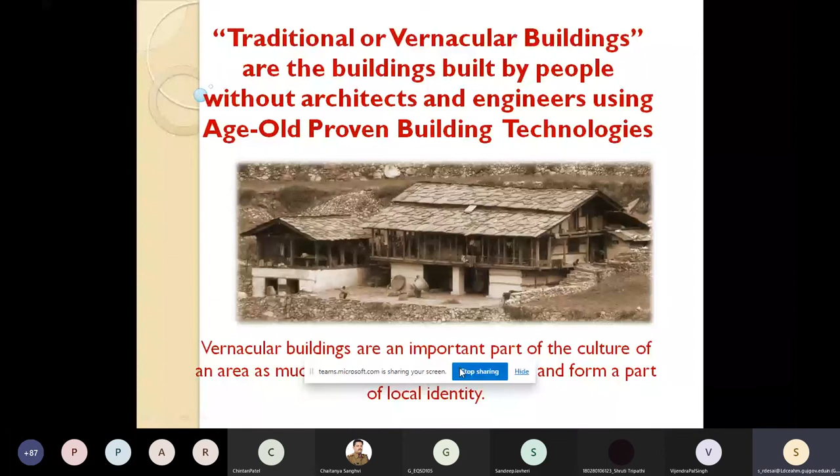So basically, these vernacular buildings, they form an important part of the culture of an area as much as language, food, and dress. And they also give a local identity. Very, very important part, integral part of all this.

So, sorry, why is this not moving? 1 minute. Wait a minute. Let me, I don't know. Let me just restart this thing here. Why it got stuck. Why I don't see this icon here? All right. Okay, sorry about that.

Technologies. All right. Let's move forward. So, let's look at very quickly some vernacular buildings in different parts of the country. Earthquake or no earthquake. Uttarakhand, of course, typically has stone buildings. There are mountains, nothing but stones. And of course the forest. So there is timber, there is stone, and a little bit of earth. So it's predominantly stone. And we go to northeast, there's ample biomass, bamboo, timber, variety of reeds.

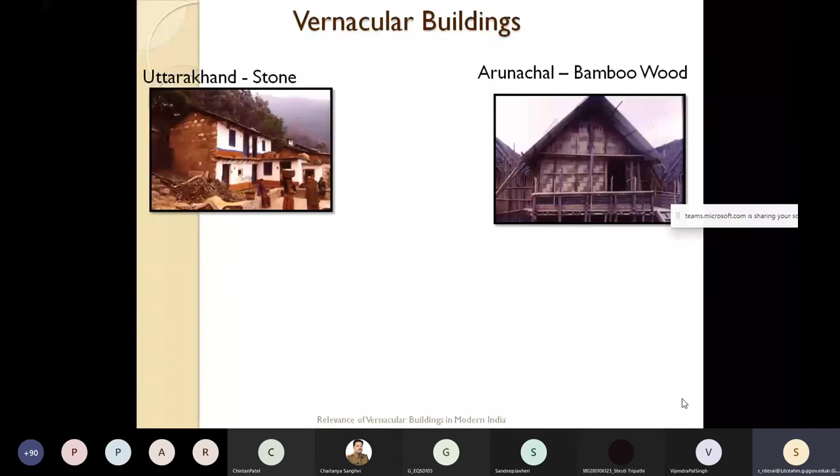Arunachal, of course, is rich with vernacular systems. Each tribe has its own system. And then you go further, a little bit south from Arunachal into Meghalaya, and you have this timber and bamboo system. Each one has its own peculiarities and very much related to the local things. And of course, in Kutch, there's a lot of stone and there is a lot of earth. So you have architecture which is combined with stone and earth.

And overwhelming majority of buildings fall in this category, vernacular buildings. We engineers think that we are these sort of designers and builders, but that is really not true. And also, interestingly, in a lot of these areas, even the lifeline buildings have been made with this kind of technologies because they are endemic to that area.

And a little bit about North Gujarat, where it is semi-arid. You have also earthen architecture, just straight mud or earth. And going back up in the Himalayas, in Spiti, and of course Ladakh and Lahaul, and all these areas which are in the rain shadow area, they get a lot of snow, but not much rain. And they are all earthen buildings because there's a lot of earth.

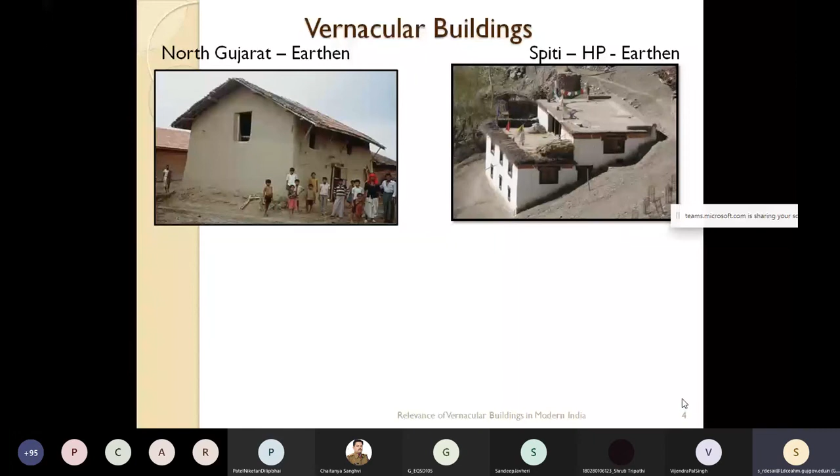And then, going to Kashmir. Kashmir has different zones, like all the states. In parts of Kashmir, you are in the hills where there is a lot of rock and there is a lot of woods, trees. So your houses are made of timber and stone or just stone. And then you come in the valley of Kashmir, Kashmir Ghati, what we call, and there is fantastic soil to make bricks. So you have brick masonry, fantastic brick masonry you have.

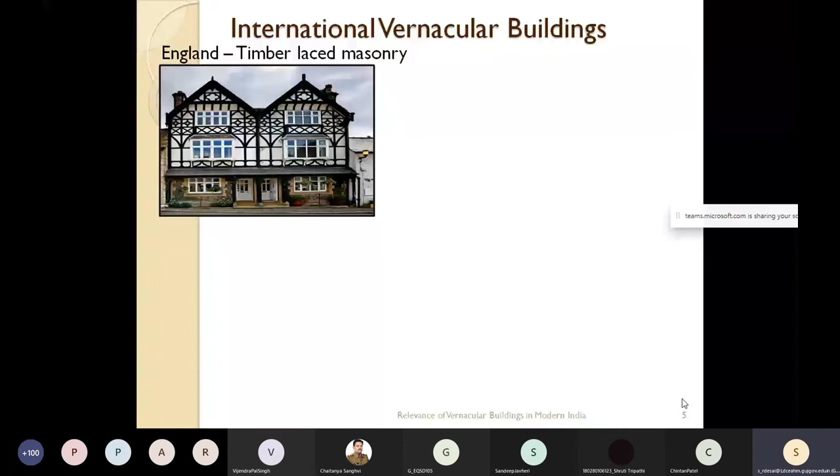And also let's look at some international stuff, because a lot of us with a lot of money, we go to England and we look at the British Tudor houses, which are basically timber laced brick masonry, just absolutely gorgeous looking buildings. And up in northern Italy, which is part of Alps, you have stone once again. So you have random rubble masonry, just like we have in our mountains.

And in southern Germany, which is also abutting Alps, there's a lot of timber. So you have timber buildings. And of course, in Switzerland, it's basically a lot of stone. And then look at this building. Look at this house, which has stone roof. It looks more like slate or flat stone. And this could be anywhere in Himachal or Uttarakhand.

There was a time when we had a presentation in Uttarakhand, and I was showing them these houses, and they were asking which part of Uttarakhand they are from. But these are world famous architecture, and people spend so much money to go and see that.

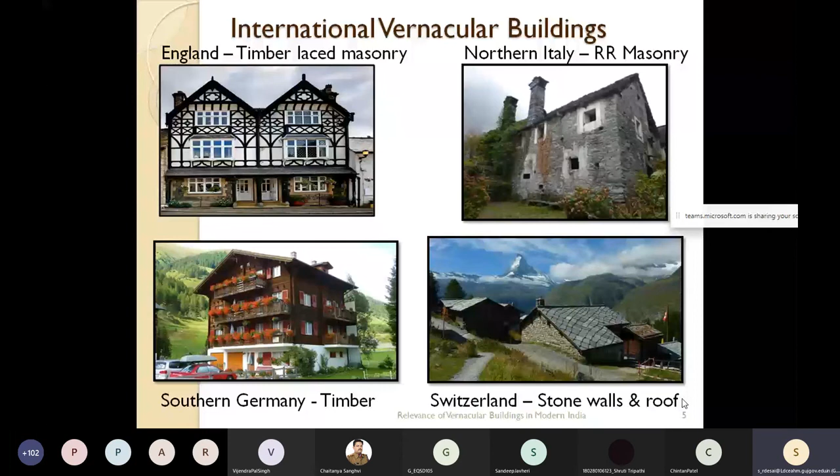And of course, we have another very interesting example of architecture from New Mexico state of Southwest United States. There's architecture of Pueblo Indians. These are the natives of America, of that region. And what you see here is the traditional American Indian settlement. It's multi-story. You can see 3 levels, all of mud and timber.

And this has become so popular in that region that expensive mud homes are made using that architecture. A lot of them may be mud houses, a lot of them may be make-believe mud houses. And believe it or not, we visited this area back in 1983. I mean, how many years ago? Nearly 40 years ago. And even then, we visited one house which was a $1 million house made of mud.

And very interestingly, you have this 4-star hotel in this town called Taos, which is a very popular tourist attraction. And you have this 4-star hotel, which is imitation Pueblo architecture. I mean, can you imagine things like that happening in this country? So it's a different world, and people appreciate these things there.

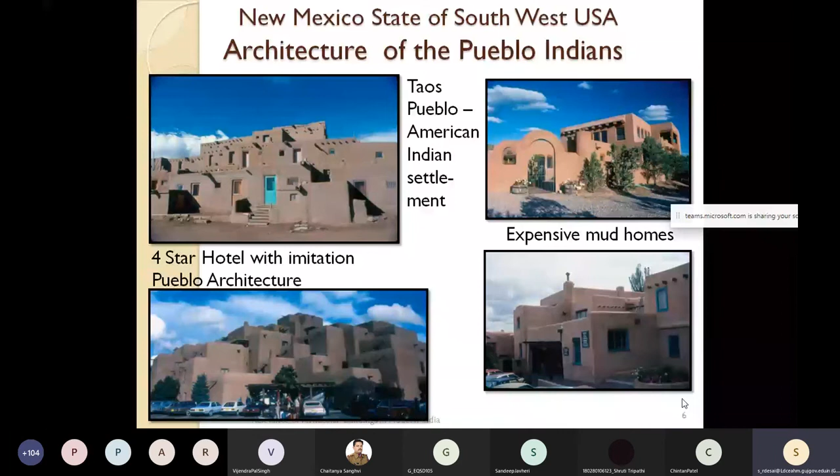Now, we need to look at some of the facts of vernacular buildings. Number one, as I mentioned, they're part of rich cultural heritage that provide unique identity to every region. Even a small state like Gujarat, it's a tiny state, and you have...

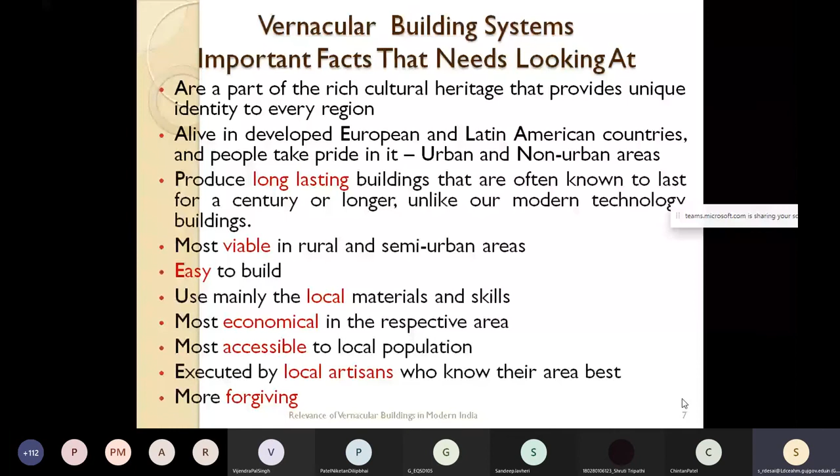There are a lot of myths, there are a lot of false understandings about this. With our civil engineering education, which starts and ends with cement and steel, there are biased mindsets. I mean, I completed my IIT education 50 years ago, and that's what I learned: cement and steel. We were not even taught about bricks. And I don't think things have changed even today. And this ultimately creates our mindsets when we come out of our colleges.

About the vernacular and traditional building system, what is it? Number one, we feel that they're outdated and they have no role in modern India. Just trash them. Number two, they are not scientific, and hence they are not worth considering for use, and hence not worthy of research. Tell me how much research gets done in these IITs and NITs and all other big engineering colleges. How much research gets done? Really, very little, if any.

Unfortunately, it's considered a sign of backwardness, poverty, and shame. And we give it a derogatory name called Jhopri. That's called hut or Jhopri. I mean, that means something that's bad, something you want to disown. And they're called kacha, and hence unreliable and unsafe. It's very, very interesting. That if it's kacha, then unreliable and unsafe. That's what our engineering mindset tells us. And so engineers are ignorant about the subject and hence have abandoned these systems in all their use.

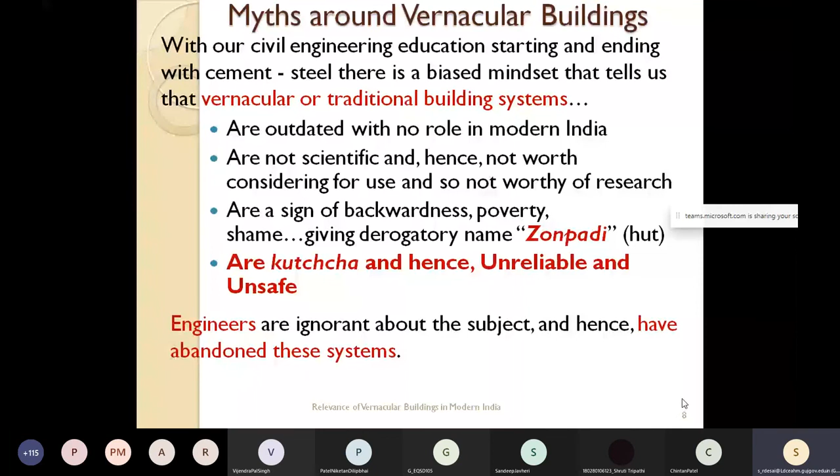Now, what has also happened in the last, I'll say maybe 26, 28, 30 odd years, poor performance in the recent disasters of these vernacular buildings has strengthened the mindset of the engineers and, as a result, the people. Now, let's look very quickly at performance in recent disasters.

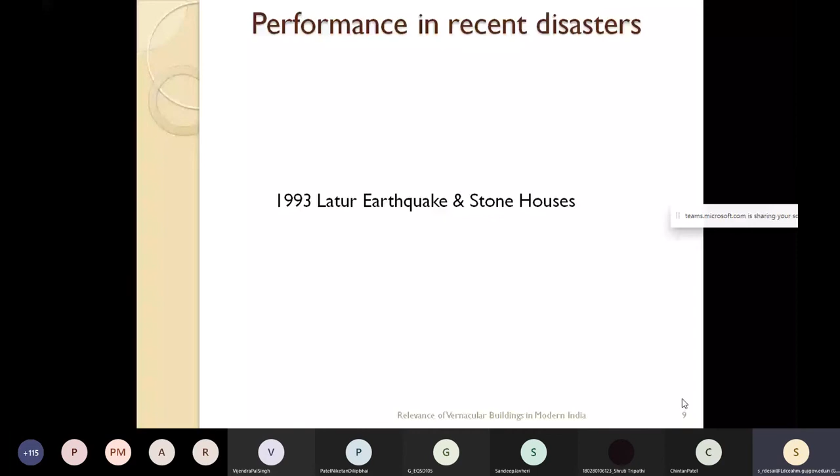It was the 1991 Uttarkashi earthquake, very quickly the 93 Latur earthquake, and basically stone houses. This is what happened. I mean, these houses simply disintegrate. And in a very small area of 20 kilometers by 20 kilometers, just think of how big that area is, 400 square kilometers, something like 9,500 people had died.

And a few years later, the 1999 Chamoli earthquake. Again, these are stone houses, and houses performed pretty badly in a small area. In between, I missed the 1997 Jabalpur earthquake, which were essentially brick houses and mud houses. A very small earthquake of very low magnitude and still kind of intensive damage in several villages.

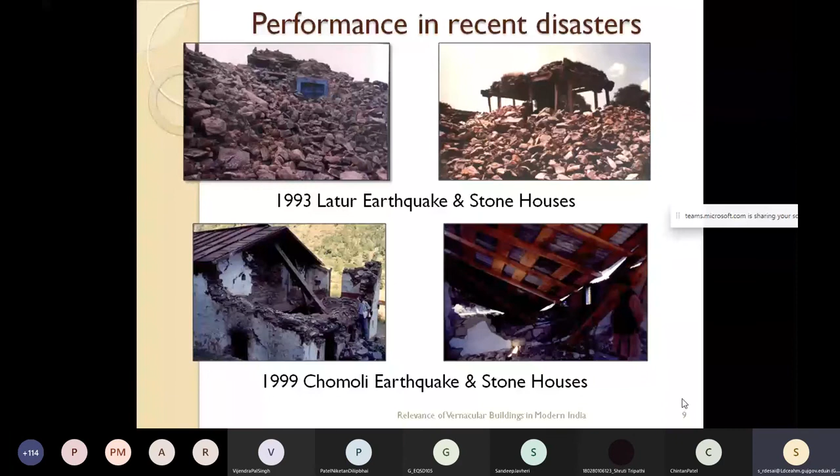All right. More recent, the 2001 Kutch earthquake, and once again the vernacular systems, primarily of stone, and of course earth, and in some places bricks, and these buildings did quite badly. And then 2005, the Kashmir earthquake, and again brick and stone houses, and this is the kind of thing that happened.

In the Kashmir earthquake, the epicenter was in Muzaffarabad, and as a result, the damage and the destruction and the deaths were of a far larger magnitude on the Pakistan side, but still a lot of damage. And this does not mean that vernacular buildings, which are what we call people-made buildings, have to be so vulnerable and weak.

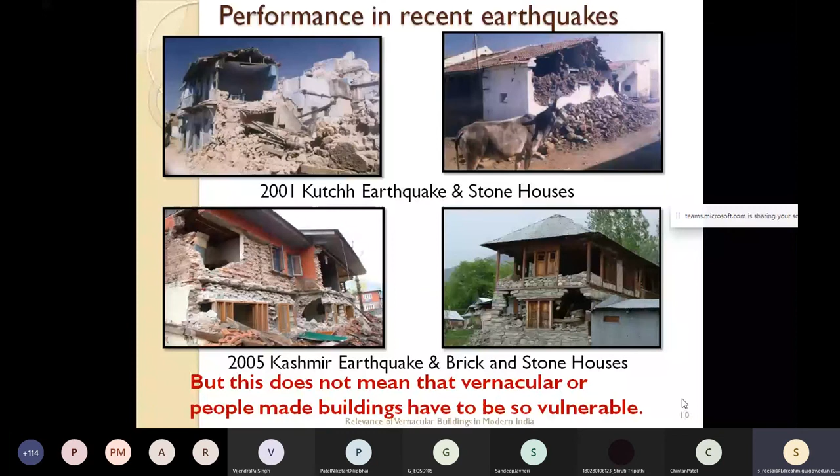Now let's understand a little bit about these buildings, the building systems. First and foremost, these systems can bring safety against disasters, unlike what we engineers think, if they're built as per the age-old traditions with proven performance. All right. What we have been seeing is far from that. I mean, I've been involved in the damage assessments in the Latur earthquake and something like 5, 6 disasters. We have done quite detailed damage assessment at ground zero.

And the first thing that comes out is that there is dilution in technology. There are missing elements, typically bands and whatever. I mean, there is acute dilution, which has happened in the last 30, 40 years for a variety of reasons. And this makes these buildings vulnerable. Of course, there is deterioration in quality also due to degradation of artisans.

Gone are the times when the mason's son was a mason and the carpenter's son was a carpenter. In the last 50 years after India became independent, things have changed dramatically. And for a variety of reasons, this tradition has broken down. And as a result, new people have entered, resulting in degradation of their skills and knowledge, and what they build. Lack of maintenance.

Our society, we are not known to be great at maintenance. We all know it. We can see these things all around. And so older buildings, obviously, when we talk of vernacular buildings, you have buildings which are 50, 60, 100 years old. And obviously with that age you pay a price in the disasters. As population is increasing, you are building on wrong sites, and a lot of these are vulnerable sites. Obviously, the buildings suffer and people lose their lives.

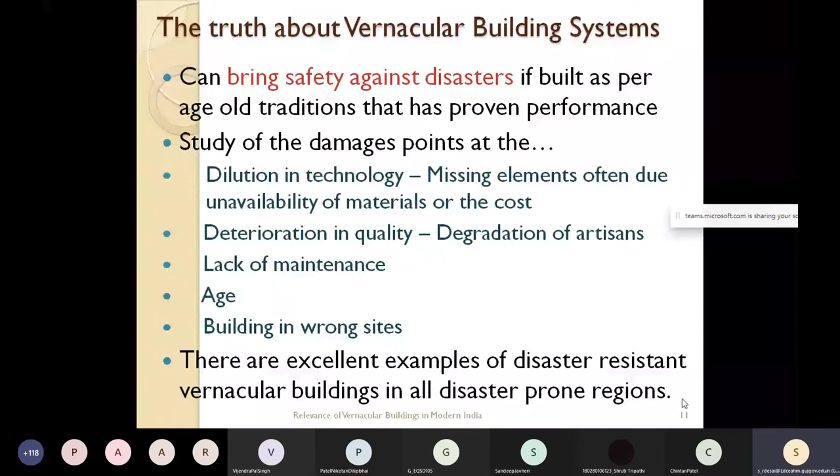So let us see some great examples of disaster-resistant vernacular buildings in disaster-prone regions. All right, let's start with Himachal Pradesh, which is obviously in the northern Himalayan belt, which is zone 4 and 5 of seismic zonation. And what we have there, the traditional buildings are timber-laced random rubble masonry, which supports the timber roof and the timber floors and the slate roof.

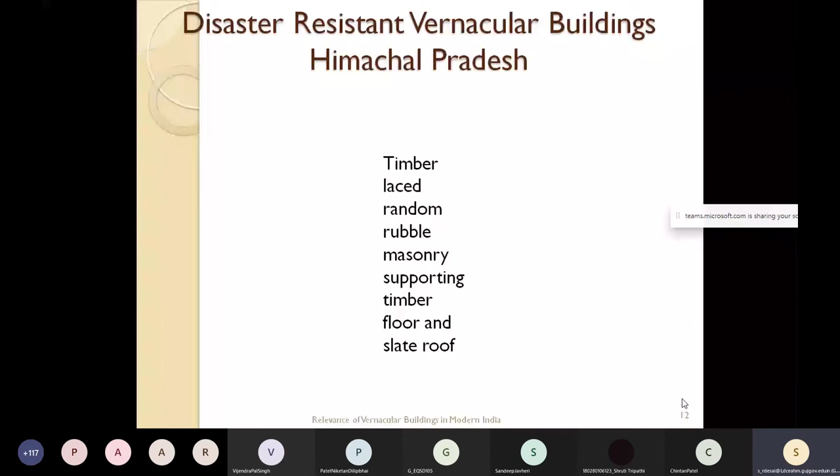Now here is a classic example. This is probably a 50 or 60-year-old house, which has a light timber living quarter at the top. And this is a fairly new building on the right, and you see multiple bands. So you have a course of the random rubble, and then comes a timber band, and again random rubble and a timber band. And you see the difference, one in the upper right hand corner and the lower left hand corner.

The lower left hand corner doesn't look that new, or maybe it's a poor man's structure, but still you find multiple bands in that. And one more example, and a lot of these are roadside, or a lot of them are inside the forest. And needless to say, you find multiple bands.

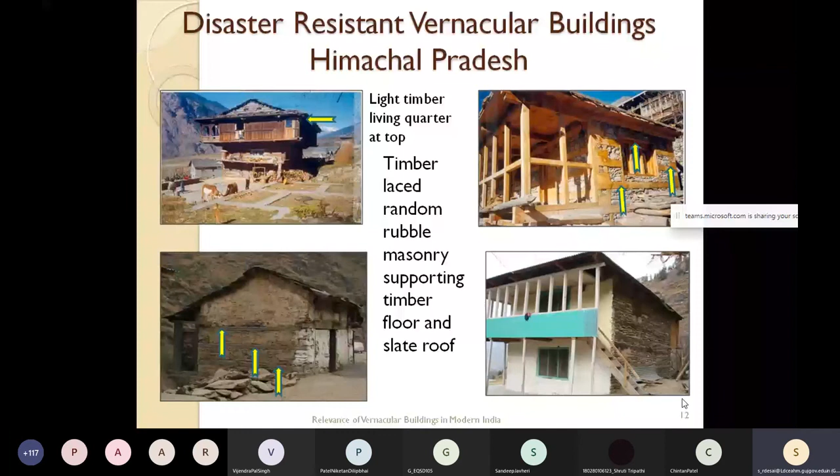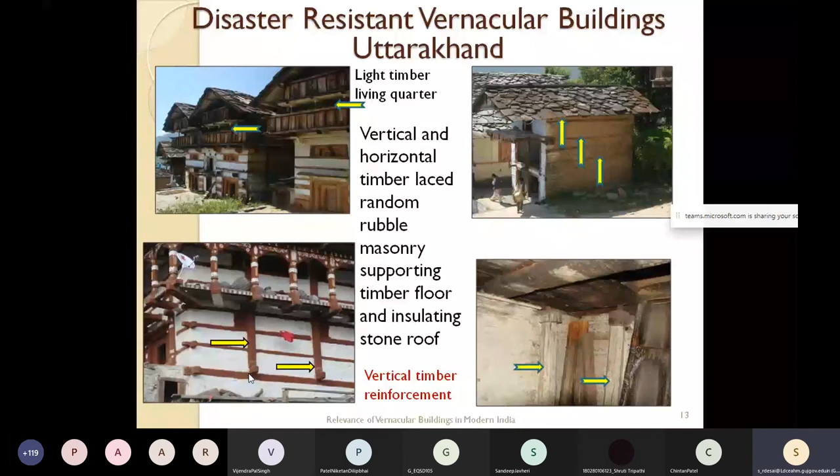India is probably the best example of earthquake-resistant building, the Koti Banal architecture of Uttarakhand. This is a 6-story building, believe it or not, though each story may only be 6 feet high. I've had the good fortune of going up to the top story. This is at least 200 years old, so it has seen many earthquakes. You see this timber element in the lower right picture, like one whole tree. Of course this is not viable today, but we need to understand, appreciate and respect this architecture.

Now look at Kashmir. The Valley of Kashmir also has fantastic examples. On the left you see thick brick masonry piers, about 2 feet thick, after every window, all in mud mortar. Inside you have solid walls acting as shear walls, and at floor level a double layer of timber providing a fantastic timber diaphragm. This is called a taq system - taq means window in Kashmiri. By modern earthquake engineering principles we'd say there are too many openings and this building is vulnerable, but no - this building could easily be 100 years old, a kacha mud mortar building.

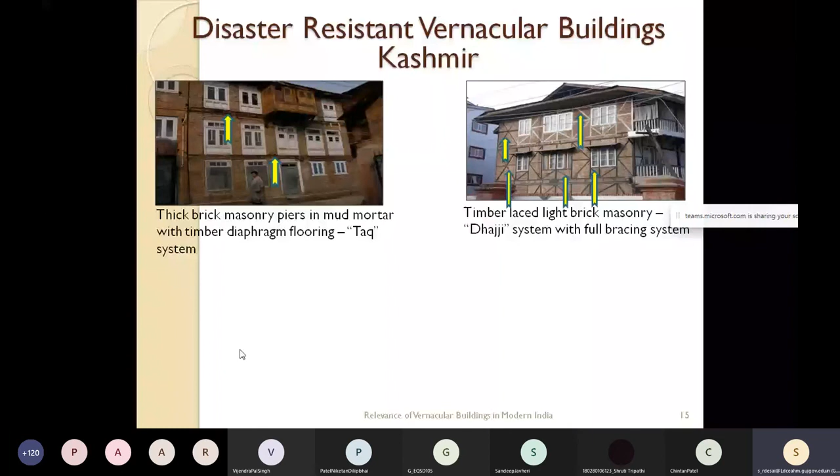Here's a fantastic building - I had the good fortune to get into this house, 80 years old. This picture was shot 10 years back, so it's 90 years old now. A typical structure, and Kashmiris have parties in their houses, so the top story is without columns or walls in the middle. Imagine - this is vulnerable by any of our modern engineering systems, and yet they have survived multiple earthquakes.

Let's move to the northeast, Arunachal, where you have either tall timber houses or bamboo frame houses. This on the left is from the Bomdila area, in Bomdila town, and is timber - solid timber columns and beams, with 2-inch thick timber panels, all tongue and groove, just beautiful. No earthquake can destroy this. This could easily be 100, 150 years old.

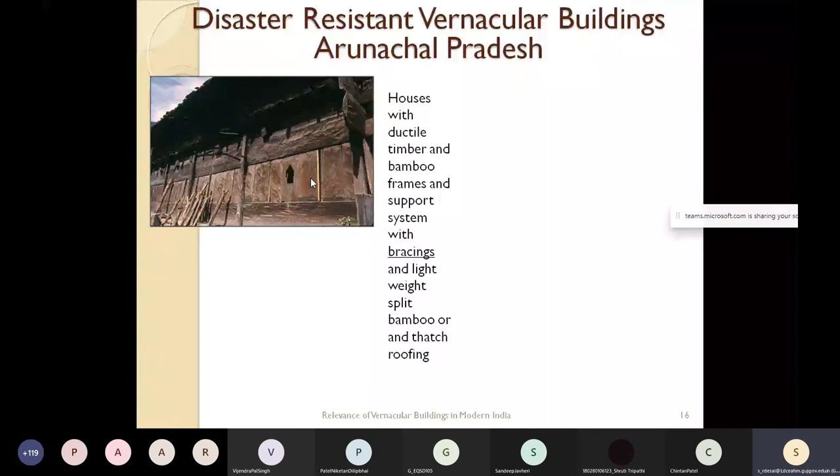So you have these things—what better engineering can you think of? After that study, we made these drawings, and look at this marvel of traditional engineering. You have bracings in the walls, in gable walls, long walls, in-plane bracings under the roofs, and bracings under the floor.

There are a lot of locations which have strong winds, maybe along a ridge, so they're very strong against wind loads, and of course earthquakes are always there. What was interesting, this was back in '93—there was absolutely nothing non-local, nothing. You found bamboo used in a variety of ways. I could make just a one-hour presentation only on these houses, but the thing is there was nothing non-local.

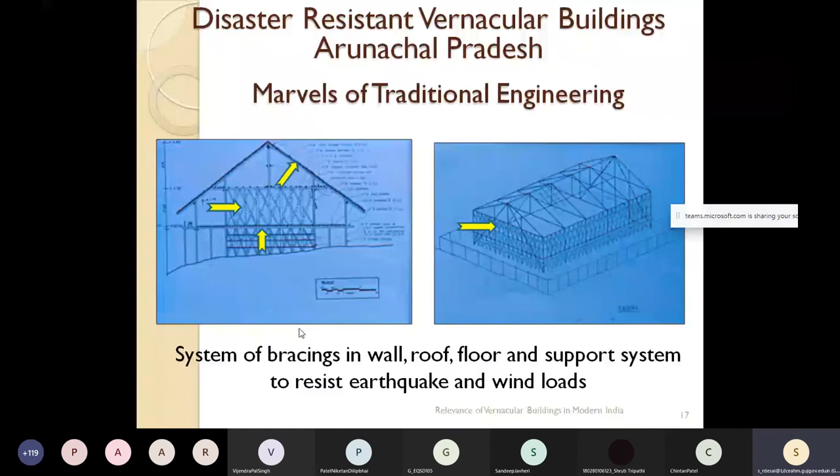Looking at some Meghalaya and Mizoram houses, once again northeast, you have ductile timber or bamboo frame, and panels made of bamboo mat or the thing called ikra, which are flexible. In recent times new things have started to come in, but again you find most of them two stories high. In the lower right-hand picture, you see RCC posts have come in, and in the upper right picture, concrete blocks, probably masonry, and of course the tin roof. In the good old days, tin roof was not there—they were thatched.

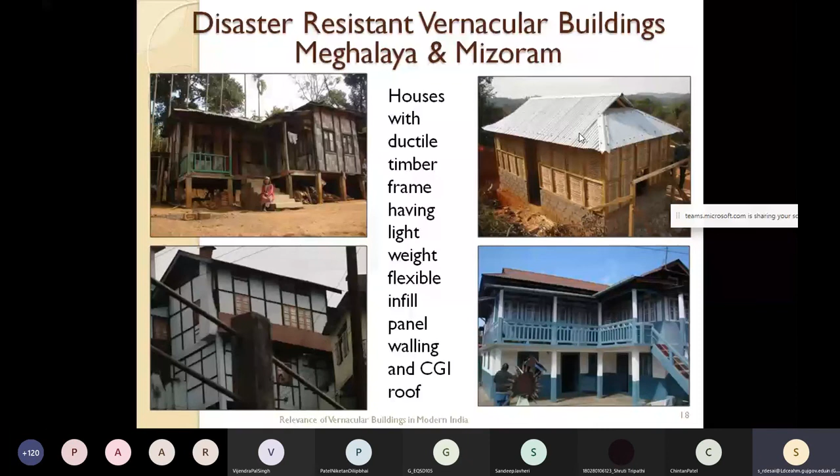Now looking at some photographs of Meghalaya in that same area, you have these very elegant heritage buildings. This is a 4-star or 5-star hotel in Shillong—we had the good fortune to spend a couple of nights in this building. And here's a cathedral from Shillong. Both are what you call the Assam style building system, very much earthquake resistant, and you can see the load path for the lateral loads. So these are the traditional buildings, and these are all modern facilities.

See, we in India have this mindset that traditional buildings cannot have modern facilities, which is the most screwed up mindset. I mean, you go to Europe and you find a 200-year-old house, and inside they have all modern facilities. So you don't have to demolish these fantastic buildings to have the advantages of modern facilities.

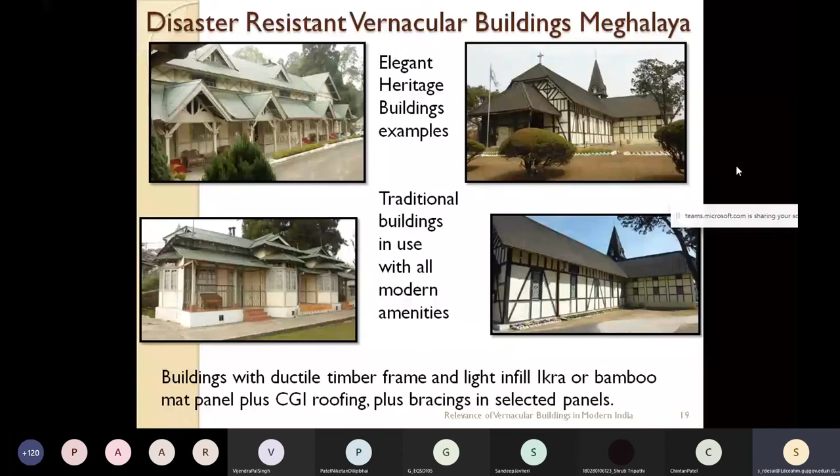All right, let's look at some common people's houses. These are in Mizoram. This is actually a farmhouse, away from the town. This one is right along the road next to the fields. Now this is like an 8 foot by 10 foot house, but it's most amazing—I could make a presentation just on this house. The inside was amazingly compact and had all the facilities an individual would need. But look at the bracing systems in both directions.

Here's another house with modern materials. The panels are, I think, more like bison panels, and you can see CGI sheets—the bottom skirting, you can call it, is kind of safe against kicks and abuse, and of course CGI roof. Look at the bracings and the base—this one actually had a cable going around the house, anchored by the roadside. So people have an understanding of what kind of forces can come on these houses.

Here is another very large structure—this may be a chicken pen where they rear chickens for selling, but look at the bracing system there. And interestingly, look at the timber joints—just using modern GI wire, they have strengthened the timber joints. These are very simple ways to strengthen the joinery and make the structure stronger and more earthquake resistant.

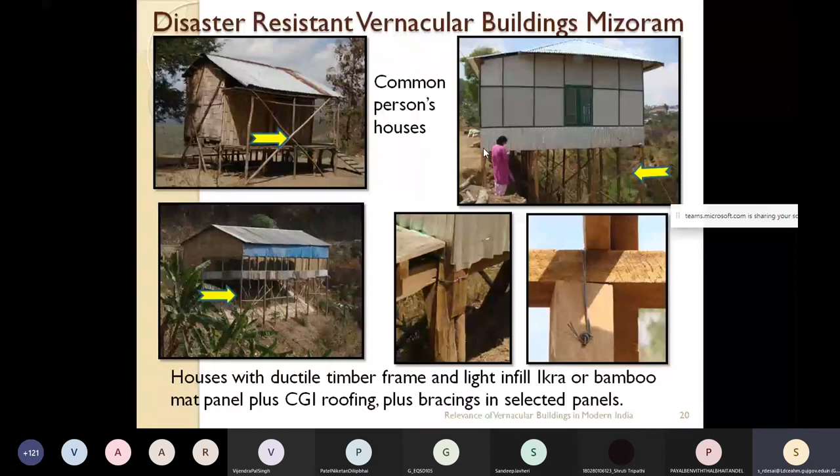So it's a mix of cement and traditional system. New materials come, and of course they may have their advantages, they may have their disadvantages.

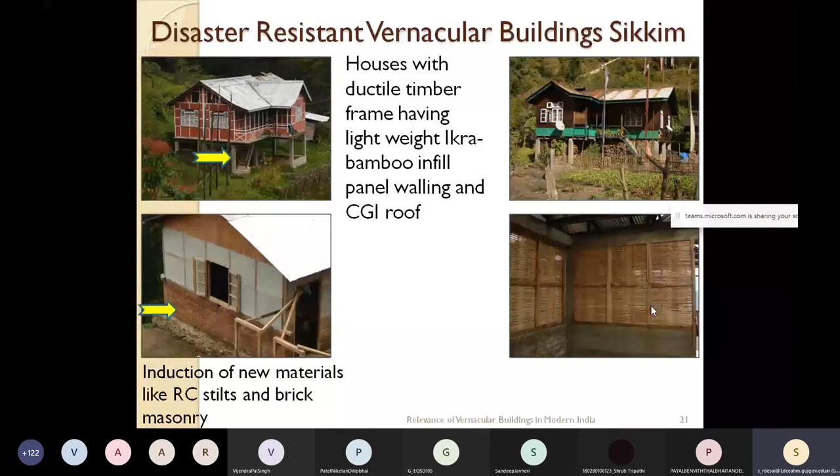In the 2011 East Nepal earthquake, or what we probably call the Sikkim earthquake, there was very little destruction in traditional buildings, and as a result the death count was something like 80 people.

Now interestingly, what happened to the modern buildings? Again, still look at the traditional system damage. Here was the dislodging of the infill panel. There may be deterioration of the infill, or some bit of shaking, and the panel came out from the groove, the tongue and groove setup.

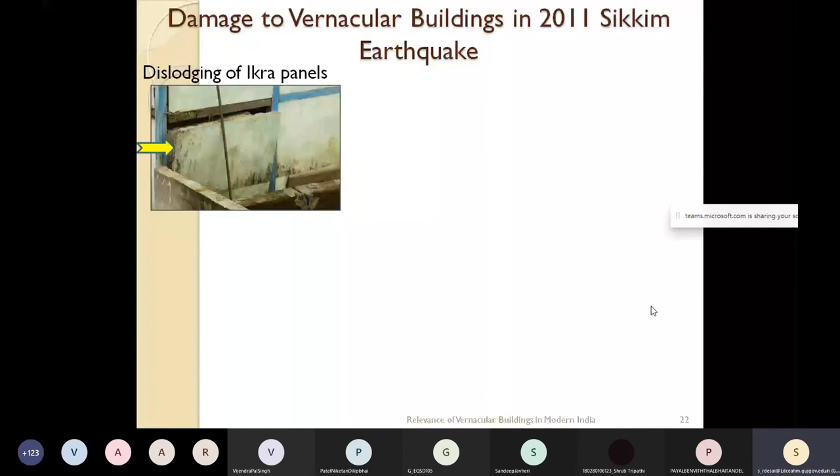Also you see an RC column under distress because this is all jugaad RCC construction, so needless to say, even that's going to suffer. But basically a lot of damage was non-structural, and even the structural damage was also of low order. Hence it did not result in collapse of traditional buildings.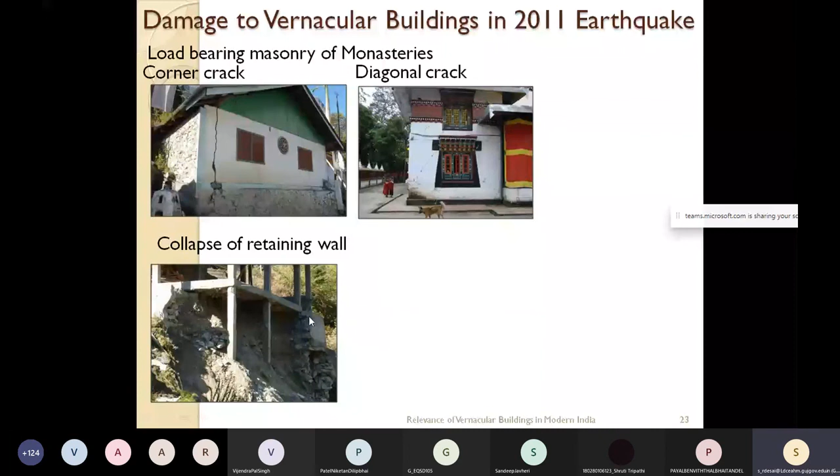Also interestingly, here at the bottom they had this retaining wall, which has collapsed. These things happen all the time, retaining walls collapsing in earthquakes. And here is damage due to stone fall - no fault of the building, maybe wrong siting.

So almost all the damage was restorable. What was really needed was to develop details, to develop better interface of traditional versus modern. This is where the engineer's role is there.

Now, finally, I'm at the modern buildings, modern RCC buildings. What happened? Here is one example - this was quite close to the epicenter in a small hamlet of Chungthang. It had some 50 or 80 houses, and a good majority was RCC. One of the things that happened was the collapse of the infill walls.

Here is a school building, and it had a soft story - I guess it's a hall, right? So that collapsed. Very common for stilted buildings.

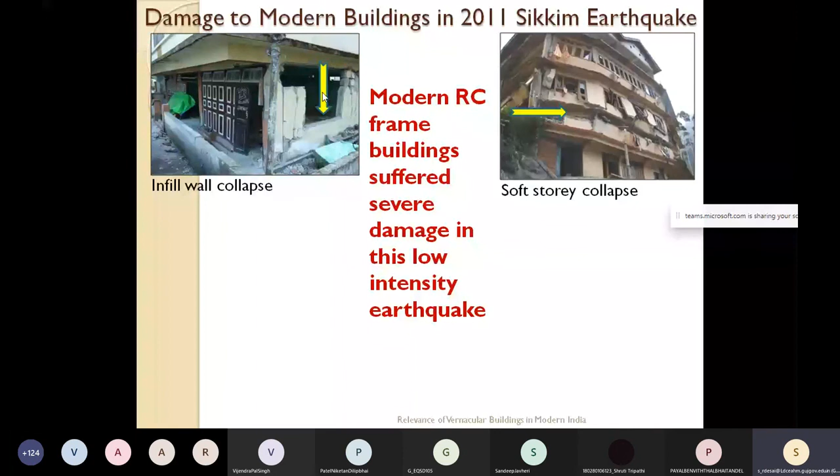So the whole issue is, which are pakka and which are kacha. We are so strong on this pakka and kacha feeling - we feel that pakka is permanent, kacha is not permanent, pakka is safe, and kacha is not safe. But what would you ultimately deduce based on these buildings?

The government had given 5 lakhs to each building owner, and said, all right, do what you want to do. So when we get into these modern building systems, which are complicated, we are getting into systems which are difficult to sustain. I'll come to that a little later.

Now let's talk a little bit about this pakka versus kacha phenomenon, because when we talk of traditional buildings, we can't get away from this.

Now, what is happening today? The modern is replacing vernacular. Here is an example of a vernacular building. This could be anywhere in the country. Typically you have clay roofing tiles on timber or bamboo, and you have masonry or mud walls. And against that, what is happening? You have this on the right side. This is a brick masonry infill with cement mortar and RC frame, a single story RC frame.

This is a PMAY house. This is the government flagship project, very well meaning, so that people have long lasting houses. And unfortunately, today, more than 90% of houses being built under PMAY are of the RC frame type. So I feel that PMAY is a death knell for vernacular architecture.

And then obviously, for people, this is a one time opportunity in their life. This is something they've wanted, they've been brainwashed, right? So obviously they will go for this, but they don't know what they're getting into. So let's look at that now. And here's the example of the same architecture in that area. Just beautiful. There's so much variety and so much to do with the local context. So let's look at this replacing.

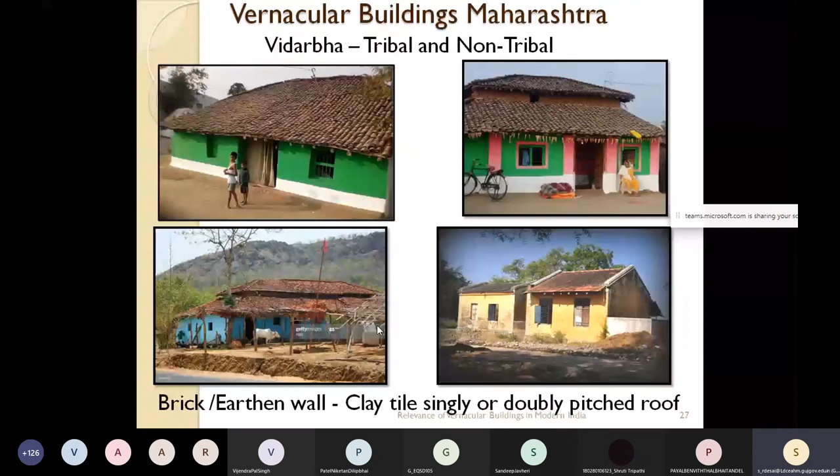What is it doing? It's basically the village wealth, whatever little there is, flowing to the cities. This is the Gandhian thought, whether we agree with that or not, but this is the ground reality. The cement comes from the cities, the steel comes from the cities. So the village wealth is getting drained and the villages become poor.

Number two, money spent on these houses generates very few local jobs, because typically maybe 80% of the money invested is in material. So what kind of local jobs? Ultimately, livelihood is the most fundamental thing for everyone, urban or rural. And buildings are the biggest creator of jobs.

Now, one more thing that's happening is the villages are becoming dependent on materials coming from far. This means that some extraneous reasons increase the cost of these materials, and people cannot afford these things anymore. Next point, villages are losing independence to take care of their most basic need: roti, kapda, makan. You want to be self dependent. And the self help possibilities are disappearing.

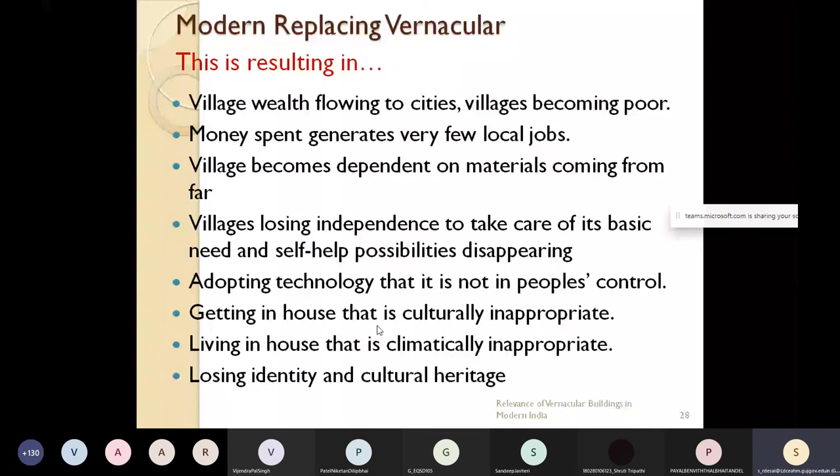Like in America, you go from New York to Los Angeles, it's already the same thing. So your cultural identity is just important. All right. Now, some more things. People are switching over to modern building technology and materials because, for Indian engineers, the ignorance about vernacular systems prevents them from using it. I mentioned this earlier. Whether it is a private project or a public project.

I remember going to Arunachal. We were at a 13,000-foot pass. There was nothing around, and far away I see a brick building, where there is stone everywhere. I asked somebody local, "What is that building?" And I was told, "Oh, that's a government building." So you are 200 kilometers from the plains where the bricks are made, and you bring those bricks and you make the government building with that. So this is what is happening.

So the establishment has switched over to modern building systems, even in the distant remote locations. So you are setting an example for people to follow: this is the way to go, this is modern. Aggressive advertising by material manufacturers is shaping people's aspirations, obviously. You see Amitabh Bachchan selling whatever cement or steel. People see these houses on TV, they see them on hoardings, and obviously people will aspire for them. Especially when the traditional houses are called jhopdi.

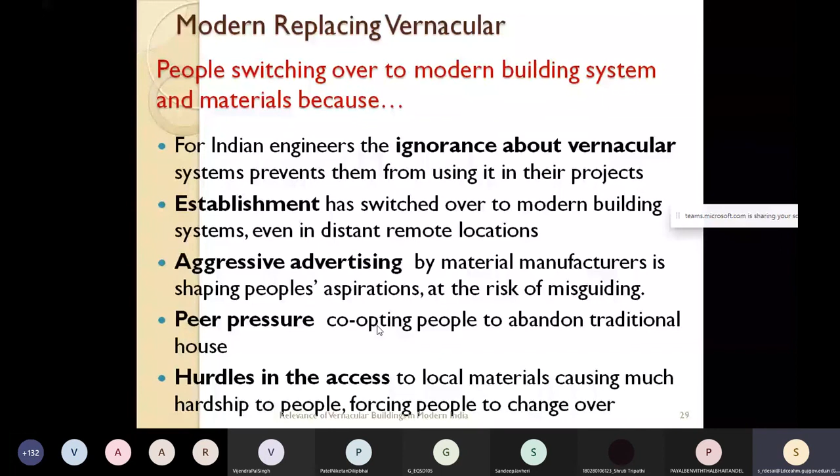Some more things. There is total neglect of vernacular systems by the engineering fraternity. No advancement in vernacular construction to tackle age-old irritants and new constraints. Sure, every building system has irritants, just like the modern systems. And these irritants have to be tackled. So if there is a leakage problem, if there's a timber sagging problem, then we have to do something about it. If we don't, then people are forced to abandon that.

The mental block prevailing commonly is that buildings of traditional technology cannot have modern conveniences. I mentioned that earlier. So somebody who wants a modern bathroom will say, no, I cannot have a random rubble masonry house, I have to have a brick house. But nothing could be farther from the truth.

Irritants and limitations of the modern construction systems are being accepted and underplayed. Isn't that true? Like I said, in our South Gujarat house that we had rented, the thing was leaking everywhere. And people say, well, in rain they obviously leak. What happens to our roads, pakka roads? Because they are badly built, we have potholes. And then people say, oh, the monsoon was so strong, so there are potholes. We accept these things. We don't say, hey, these things have problems.

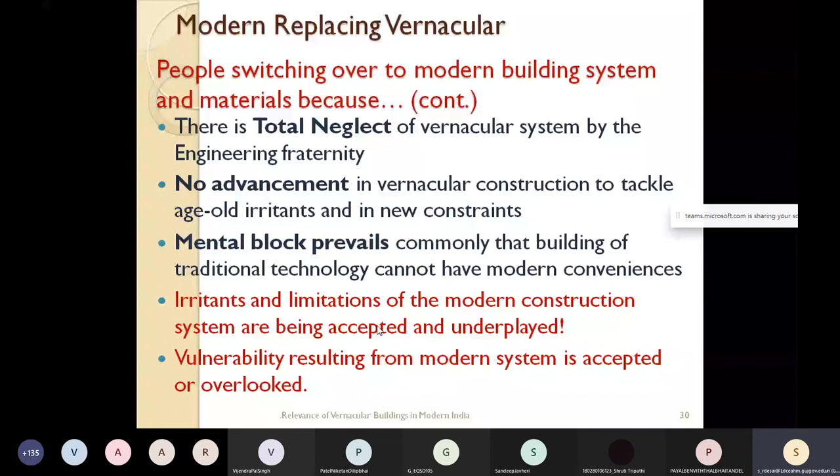What happens then? Of course, your roofs leak, but the leakage is maybe temporary, maybe only when it rains, but your reinforcement corrodes, and we all know what happens. But we don't think of it because this is the only solution we know. So the whole question is: is the so-called Pakka construction system really safe and long-lasting?

For an engineer, based on our education, a structure is either safe or unsafe, right? We all do this thing: WL square by 8 divided by section modulus gives the stress, and if the stress is less than allowable stress, then it's safe. If it's more, it's unsafe. Redesign it. Which means everything is either black or white, nothing in between.

But we all know that the reality is different. As they say in English, things are in a thousand shades of gray. Our buildings are neither absolutely safe nor absolutely unsafe. They range everything in between. The degree of safety varies from building to building depending on how it is built and who builds it.

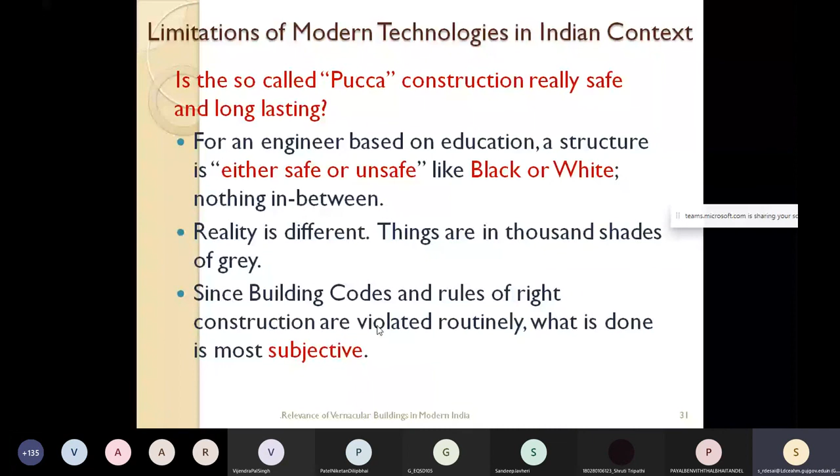Since the building codes and rules of right construction are violated routinely, what is done is most subjective. In seismic zones 4 and 5, we are supposed to use 1:4 mortar for brick masonry. But one can use 1:8, 1:10, 1:12, isn't it? That's a reality that we see. So subjectivity. One can put any steel anywhere. We see jugaads everywhere.

So the limitations of modern technology in the Indian context: wrong practice means safety and durability are compromised. Modern RC-based systems comparatively are more complicated and less forgiving. We all know that one joint failing in an RC frame system can trigger failures of the next joint and the next, and it can mean collapse of the whole structure.

Vernacular systems that way are easier to build and more forgiving. Sure, in random rubble masonry, if there is no interlocking of the wythes, if there are no through stones, the wall is going to come down. But with some mistakes here and there, it's not going to come down. We all know that. So Pucca does not guarantee safety and permanence. We need to accept this. Vernacular has a greater likelihood to bring safety and longevity because it is easier to do.

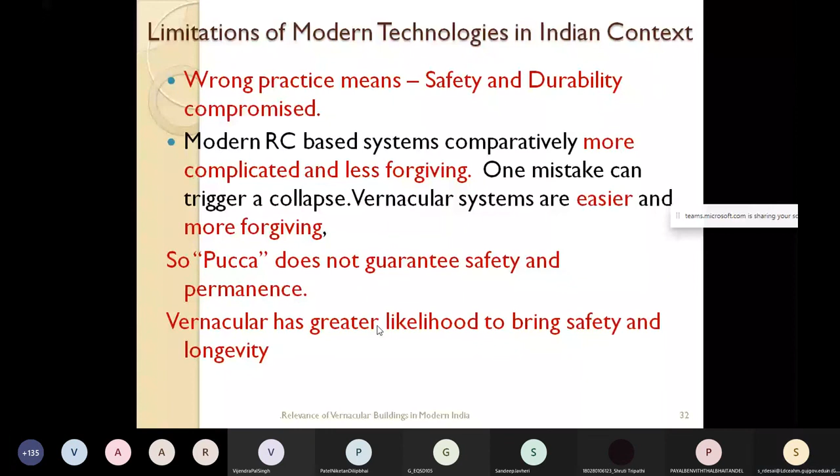Anyway, things are not all that bad, I'll say, because I'm used to looking at the silver lining to the dark clouds. Still, a significant percentage of the population has been continuing to use traditional systems, even for new buildings, for a variety of reasons. Significant work has been done for improving traditional building systems in different parts of the country, especially since the mid 80s.

We have been involved, many other people have been involved. I think our next speakers have been involved for a few decades. Work has been done in Kashmir, Uttarakhand, Bihar, Karnataka, Kutch, Maharashtra, everywhere. Training programs have been conducted. Today a big program is going on in Bihar to train the masons. Projects have been undertaken to demonstrate the technologies.

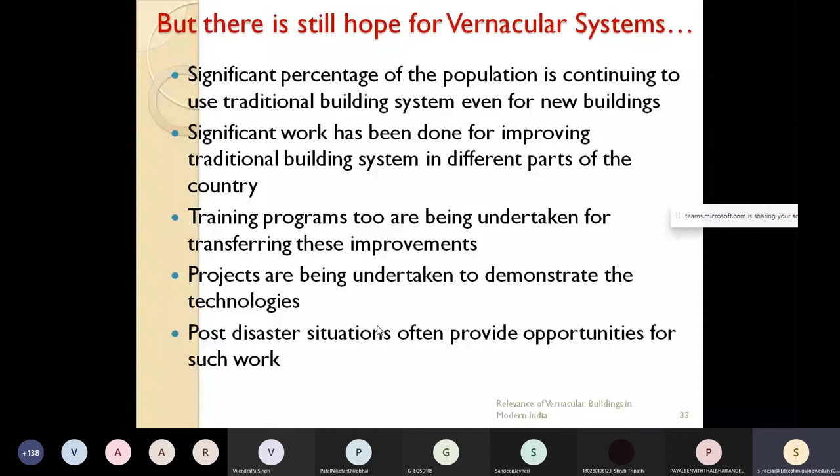Typically, a post-disaster situation brings in a lot of money, which is oftentimes not there in normal times. So these provide opportunities for such work and for training. After the 2001 Kutch earthquake, in 3 years, our group trained about 8,000 masons. Obviously, because there's a lot of money, there is a felt urgency at that point. So let us look at some examples of what kind of improvement is being done. First, I'll start, of course, with Latur because we were there.

We were there for about 6 years, starting with the end of '93. We left Latur in 2000, but intensive work on technology got done in '94 to '98. Now, of course, we were absolute strong promoters of local systems, and hence some of these houses came up as demonstration, and also we were able to convince some of the donors to take up programs.

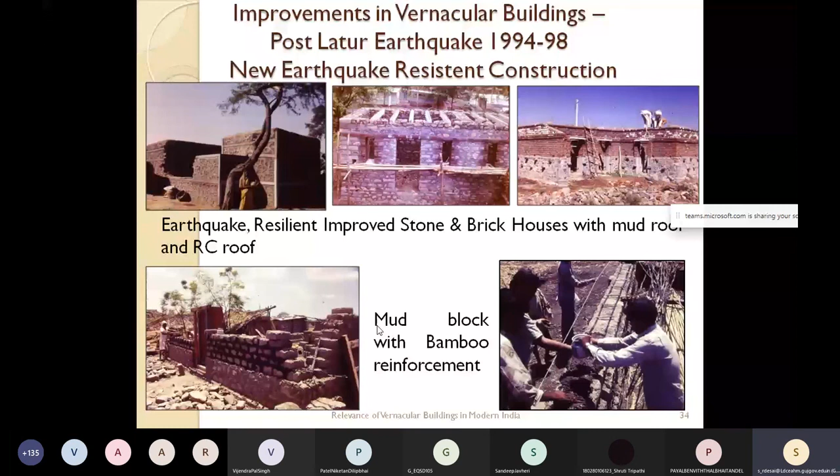So a variety of things happened, and the left-hand picture is very much part of the traditional rural landscape, very much merging into it. All right. Also, the poorer people there were building the mud block or adobe houses. And with our intervention, we also demonstrated to them that bamboo can be used as reinforcement, as a band at different levels. So these kind of things are done. All right. Some more examples in Latur also.

Although something like 30,000 houses had collapsed, there must be at least a few lakh houses in that whole region, the whole Marathwada and adjacent Karnataka, adjacent Andhra, where these kind of houses of random rubble masonry with heavy mud timber roof are there. And they're all of the same system and very, very vulnerable. So we also took up retrofitting, improving the traditional building system so that it becomes safer.

See, one major thing we have seen was that in the post-disaster, people lose confidence in their system. Obviously, because they will see that somewhere something what is called Pucca has survived. In Killari, in the '93 September earthquake, only one house was an RCC house, and it survived, because this was only a 6.4 magnitude earthquake, whereas you had these thousands of houses which are extremely vulnerable, and they were just waiting to collapse. Because this was not a seismic zone, mind you.

So obviously, when they see thousands of houses collapse and one RCC house standing, they all want that kind of house, and people are going to quickly run to those houses. So retrofitting is one way to rebuild their confidence, one way to prevent the demolition of these wonderful houses that people are living in. So simple measures were done, and we managed to work with 150 households and retrofit them using their money. And this was basically done with Professor Arya's guidance.

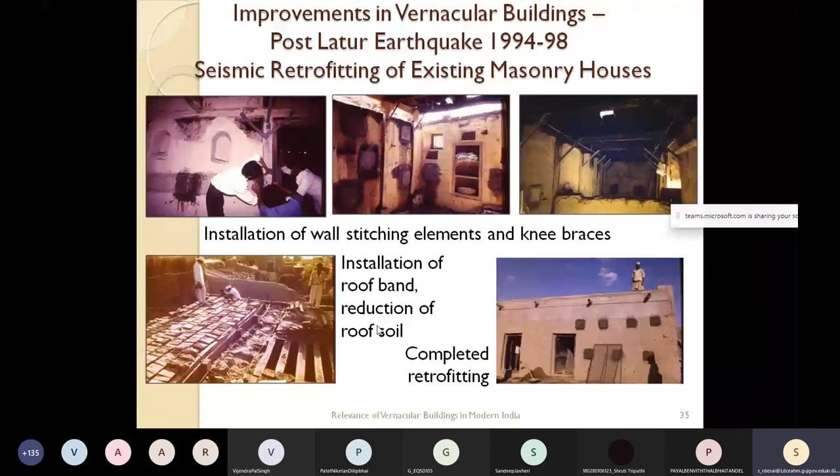Later on in 2009 and 10 in Bihar, multiple NGOs, I think they will probably be talking about this in the next presentation, did wonderful work on bamboo houses. Now, in that particular region of Bihar, bamboo is the most traditional and common building system along with bricks, and each village has a bamboo crop, so you can have fantastic bamboo right there. Now the requirements of Bihar: it is a flood prone area, it also has high wind problems, and of course seismic zone 4. So all three hazards are there.

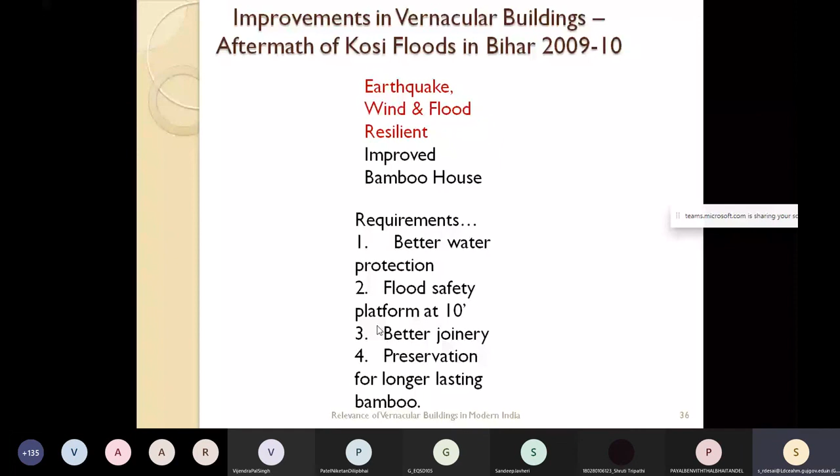So requirement number one was water protection, that the house must not fall apart under flood. The improved bamboo system had excellent cement plaster which adhered well to the bamboo walls. Number two, it was also important that when the area remains flooded for more than a month, people are able to survive above the flood mark. So the non-negotiable requirement was there should be a platform for safety where people can live at the height of 10 feet.

The third was the improvement in joinery. The traditional joinery had problems, so remarkable work was done to improve the joinery, and several hundred artisans were trained in this. And of course, as we know, bamboo has a preservation problem. Bamboo will rot very quickly. So, very interestingly, the preservation system was brought in, and special local professionals were involved to do treatment of local bamboo. So, this is a complete system. In different countries, especially in Southeast Asian countries like Thailand, Taiwan, and of course in Latin America, amazing work is getting done.

And some absolutely fantastic bamboo structures are getting built. But along with that, preservation is an integral part of it. Without preservation, you can't be talking about these technologies because they don't last long. So why would anyone not want to build a bamboo house for all these disasters?

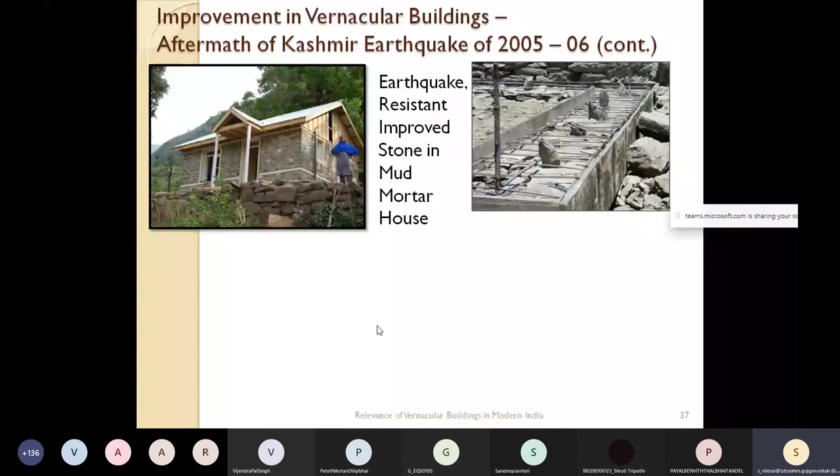In Kashmir, after the 2005 earthquake, we had the opportunity to make a number of interventions starting with 2005, 2006, 2007, 2008. So one of the things we did, we spent nearly 3 months near the LOC, and what we worked on was the improved random rubble masonry in mud mortar house. So multiple bands were brought in. Now, traditionally, they used to have wooden bands in many houses. We had to bring in RCC bands because wood was not that easily available.

Better anchoring of the floor and the roof with the wall is an integral part of earthquake resistant construction. We are known to build roofs just simply placed on top of the walls. So obviously, the buildings fall apart. One of the things we did, in these houses they had this Dhajji Dewari. Most people know about Dhajji Dewari in Srinagar, which are timber laced brick masonry walls. But there are also timber laced stone masonry walls, which are about 6 inches thick. And these are also fantastic walls.

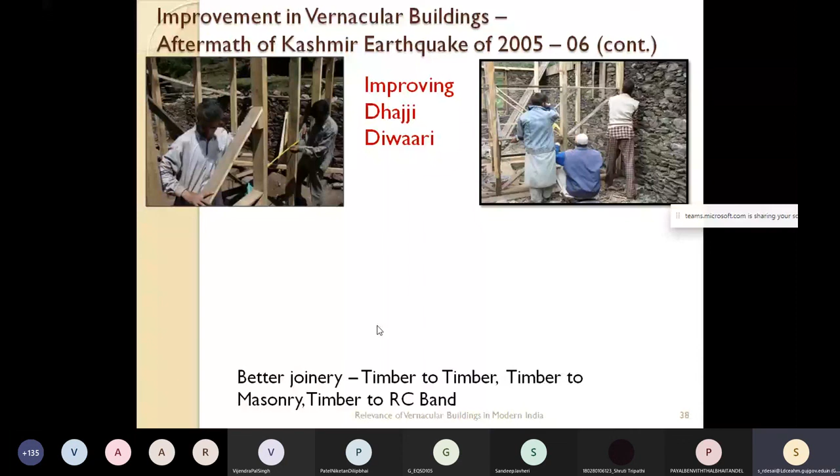And typically, these are used as interior dividers, not what you call partition walls. These are shear walls. These are load bearing walls. So we studied the failures, and what was needed, number one, was better joinery. Also, timber to timber joinery. The next thing required was joinery between the Dhajji wall and the exterior masonry walls, because otherwise your masonry walls are going to be weak, being very long.

We also introduced a band that will go on top of these Dhajji Diwaari so that that band gets integrated with the band on the exterior walls. And so all in all, we made major improvements in the Dhajji Diwaari. I think this is common sense engineering going into it. And you need to be sitting there.

So I and Rupal and our team, we are 5 of us, we spent 3 months near the LOC. We did intensive training of 30 artisans in these buildings, and these fellows then later on built more than 300 houses for a major international foundation there. And this is a permanent thing which was left there with people. The artisans are still there; they still communicate with us.

Coming to the Gujarat earthquake in 2001. A large number of NGOs worked, and of course, a few of them were technically competent. We were part of that system, and we worked very closely with the Gujarat State Disaster Management Authority. So, like I say, during those 4 years, we trained something like 8,000 masons. And in this one particular program with the Gujarat State Disaster Management Authority, which was focused on close to 500 villages, about 6,500 masons were trained.

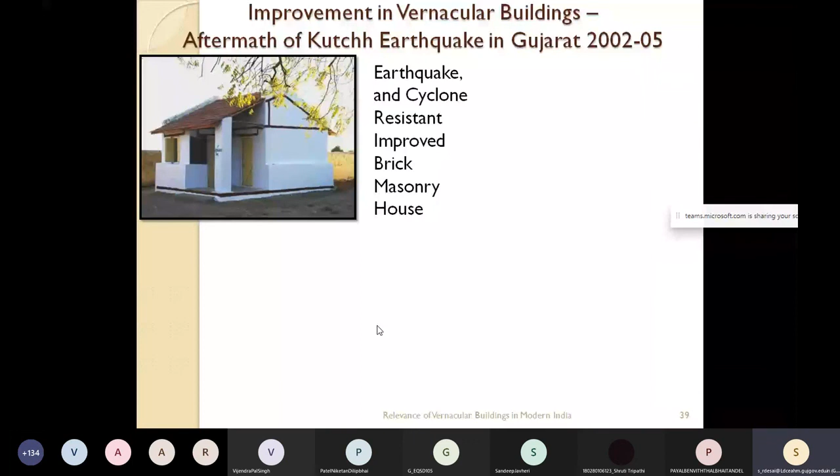So here is a multi-hazard resistant masonry house, which was built as per the official guidelines. It had multiple bands, needless to say, and it had simple fixtures to anchor the roof. Simple things were brought in. Nothing hi-fi, common sense engineering, a simple anchor bolt at the top of the gable wall so that the ridge beam can be anchored. And of course, in the roof, a simple diaphragm was introduced using GI wires. And as you see, you can see the gable band and a variety of things, but simple things were there.

Also, how would people know that this technology works just because I go and tell them? Latur was an interesting experience with us. Latur being so accessible, just like Kutch, there were so many technological groups working there, and each one had an idea to sell. Sell is a bad word, but basically these are all well-meaning. They want to help local people. But the whole question is which is right, which is better. Why would someone trust what I'm saying?

So one of the things we did was a shock table test. Now again, this is something we learned from Professor Arya, and he himself also had to perform a shock table test to demonstrate how effective his retrofitting scheme for random rubble buildings was. In the government system, there were something like 550 government engineers, from the chief engineer down to the junior engineer in the field, who did not believe in what he was saying. So he had to ultimately demonstrate it.

He got a simple shock table built, with a tractor giving impact from both ends, and it was a fantastic demonstration. So we took up his design, and in the engineering college in Latur, we built a platform and carried out four tests.

One test had retrofitting in it, showing that retrofitting works. We also demonstrated what people are doing versus what needs to be done. The upper left-hand picture shows a brick masonry building with cement plaster, done in cement mortar the way people do it, but typically cured for only 3 days. So that's what we replicated.

On the left side is a random rubble masonry building in mud mortar with an RCC band at the top, small corner strengthening elements, and of course the roof anchored to the wall.

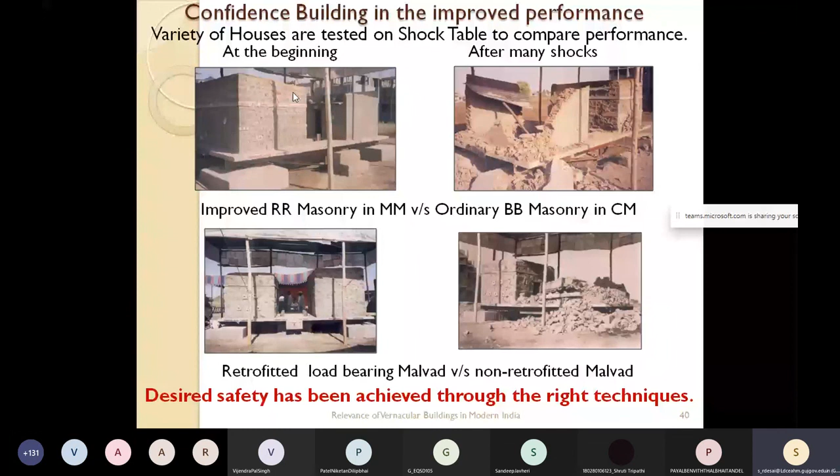The cement was brought in from Dehradun. Finally, when it reached the site, we saw that the number of bags of cement had hardened. We don't know what happened—just in a period of 3 days, this happened.

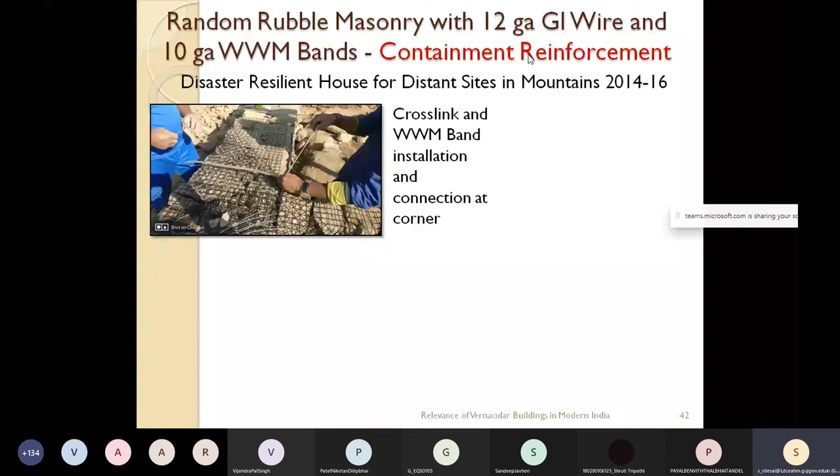In 2015, we evolved this system with his guidance, and it was submitted to the Nepal government and approved. This system basically has, as you see in the left-hand picture, weld mesh bands, and it's all done in mud mortar.

The weld mesh straps are laid in the wall, and mud mortar is placed on it, and then random rubble or brick can be placed on it. You have 12 gauge GI wires on both faces of the walls, placed during construction across the cross links to anchor these vertical wires. These wires are at about 3 feet gap horizontally, anchored to the wall at 16 inches center to center vertically, on both faces. That's why you are containing the masonry, so this is called containment reinforcement.

What you see on the right side is a 2.5-story stone earth house with the CR system. Mind you, IS 13827, 828, all these codes don't permit mud mortar for more than a 1.5 story. But in the mountains, in Uttarakhand, Himachal, Kashmir, and in Nepal, the houses are always 2.5 story. The flat land is not available, and they have to have space for the cattle and for storage. So they have to have 2.5 story houses, and the code doesn't allow them, and that's why the system was evolved.

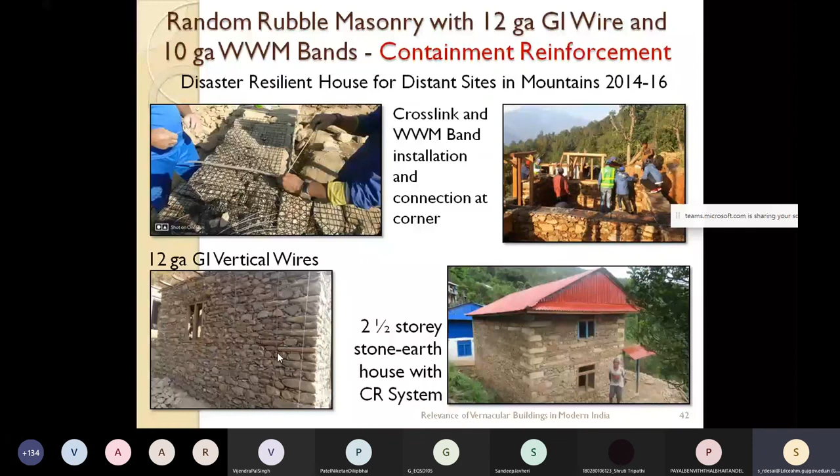For our own confidence and understanding, shock table tests were performed. Back in 2005, we installed our shock table that we had used in Kutch. This shock table we brought to Nirma University and reinstalled there. In 2015, after the Nepal earthquake, we conducted several tests. We conducted the first test on a 1.5 story house and then on a 2.5 story house. It's a half scale house, the biggest model we have ever tested.

Something like 14 shocks were given from our 1.5 ton pendulum. With that, the shocks are given, and the structure survived very well with very little damage. In the 13th and 14th shocks, the base acceleration was 2g. In the upper right hand picture, you can see this pendulum has just hit the table, and you can see that the structure is intact.

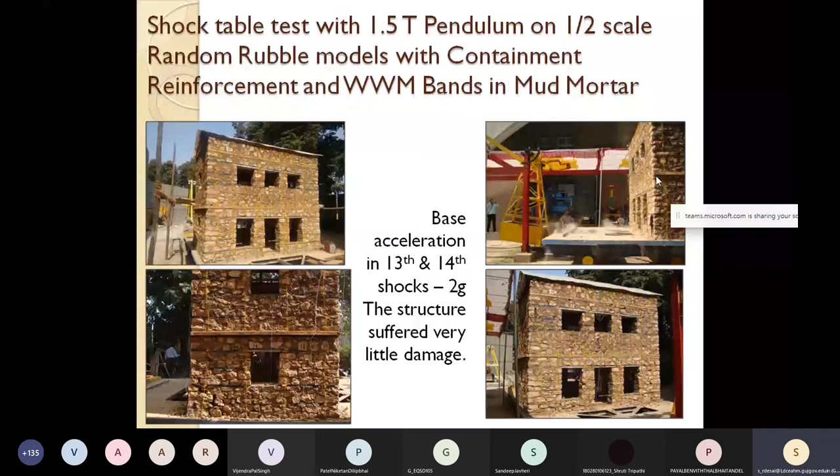With this data and the analysis carried out by Professor Jagdish, we prepared a package. This was done for UNDP Nepal, the United Nations Development Program Nepal, with their support.

Oops, wait a minute. What? Why is my video not working here? Well, I think I'll show the video separately then. Okay, there you go.

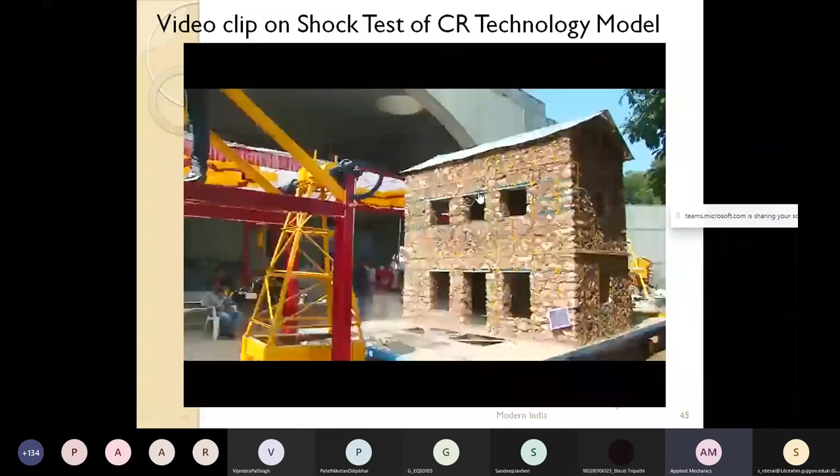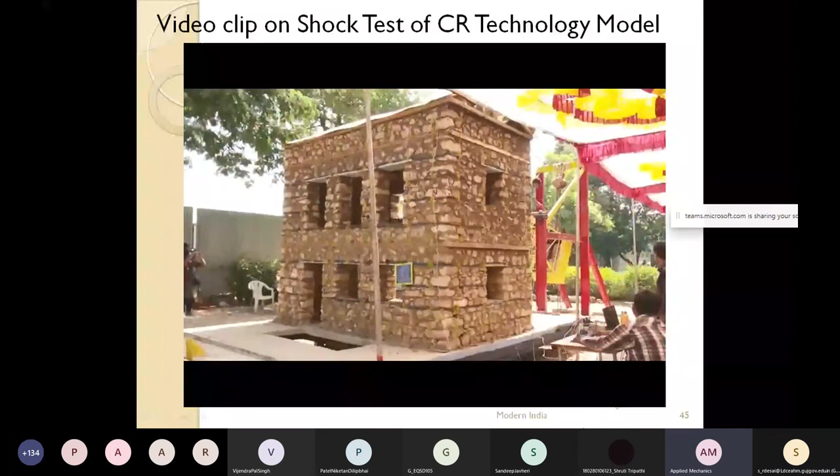Hello sir, we are not getting audio from the clip. Sorry? Audio is not clear, from the clip there is no audio. We can't listen to whatever is in the video, whatever we are performing. Just we can see the video, but the audio is not possible. Yeah, no, no.

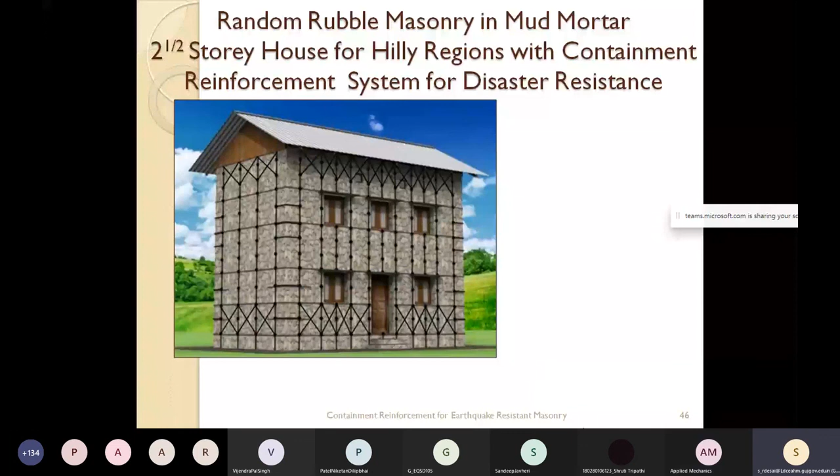I don't know why the audio didn't come, but anyway, this is what you see. This is a schematic that was submitted to the Nepal government, and this was approved by the Nepal government in 2017. It took a long time, I don't know why. More than 300 houses have been built and several hundred artisans have been trained. This is an excellent example of synthesis of the traditional with modern science and material.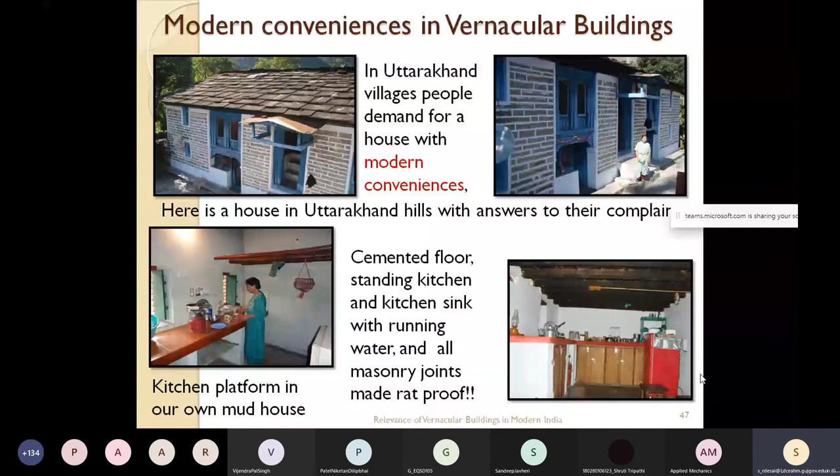Just one other factor I want to mention is the energy consumption in construction, because all the materials we use, which have special properties, these properties have been created by the consumption of energy. A typical brick uses 1850 kilocalories, cement uses 3750 kilocalories per kg, and steel uses 8500 kilocalories.

Typically every house consumes a lot of energy, and this means it has a carbon footprint. On the other hand, in the vernacular building system, there is very little embodied energy, if any, and as a result, it emits very little poison into the air.

Another great thing about these traditional systems is that they allow recycling. Recycling means a very small carbon footprint and requires no long distance transportation that consumes energy and pollutes air, and it's suitable for local climatic conditions. I basically covered all these points earlier. So this is the most green and sustainable option.

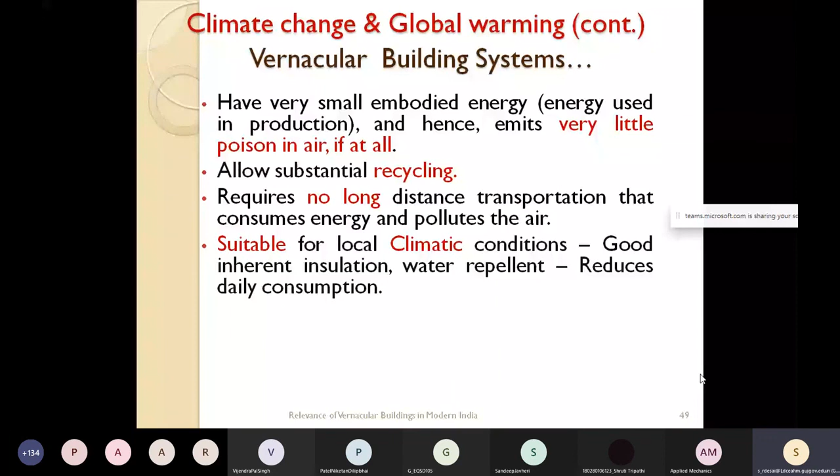Today, with all this Western influence, we are talking about green architecture and all that, but we have these wonderful examples in our own backyard.

If we continue using vernacular systems, they will contribute significantly towards reducing the impact of climate change. To me, this is the greatest disaster—climate change—not earthquake, not cyclone. They come and go, but this thing is going to be there, and it's going to create changes which are very, very scary. We have to be scared; only then will we do something about it.

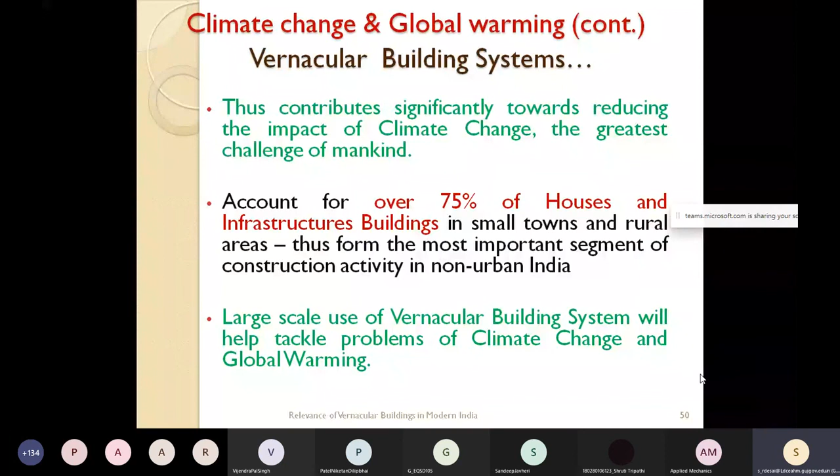These kinds of buildings account even today for 75% of houses and infrastructure in small towns and rural areas. So they form the most important segment of construction activity. If these vernacular systems are continued on a large scale, I think they will help us tackle climate change and global warming.

Here I want to bring one interesting example of a house we built 30 years ago. This is built about 30 kilometers from Ahmedabad, and it's a mud wall house. A number of technologies were used.

Imagine, we built the house in 1990 and it still survives. All the timber, which typically would have deteriorated completely in 5 years, has survived because we carried out a hot and cold treatment on site.

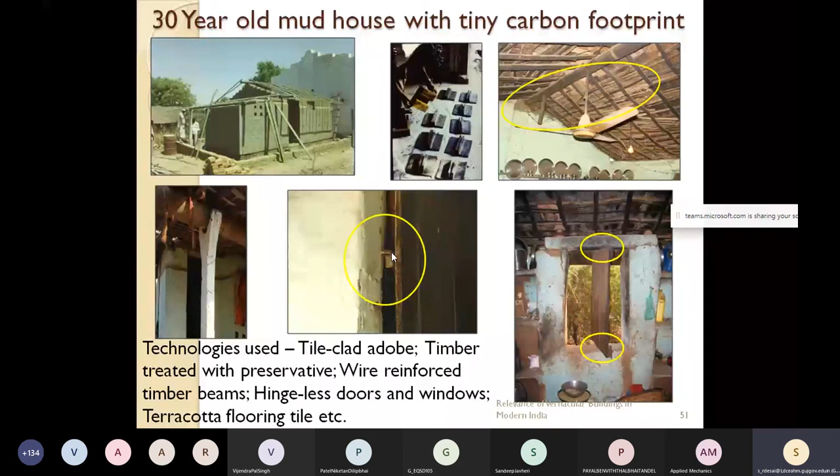Here is the house back in 1990, and here is the same house after 30 years. Interestingly, PMAY's main requirement is that the house should last for 30 years. So my question is, can this house qualify for PMAY?

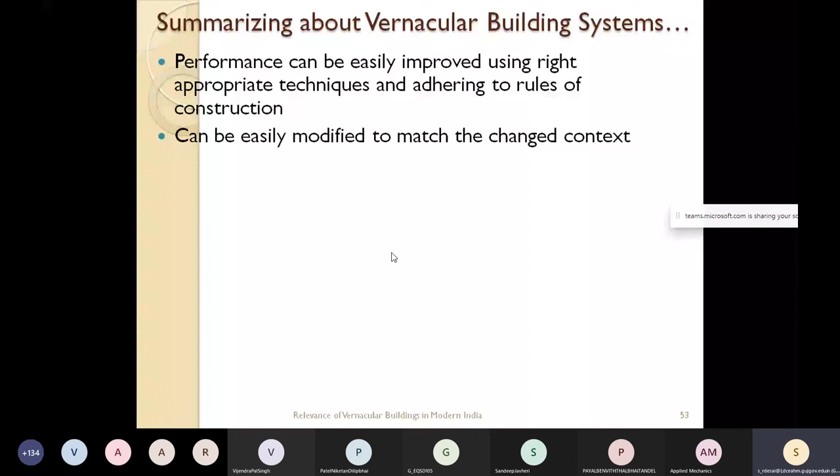I think we have talked about this—the vernacular systems are very versatile. They can be modified to change with context. They can be made disaster resistant in an affordable manner. What is required is to do research and field trials, to remove the age-old irritants.

Today typically people don't want to use clay tile roofs because they say the monkeys break them. So what can we do about that? Why can't the IITs and NITs do research on that? Timber preservation—why can't that be made mainstream? Why can't every village treat the timber? A lot of simple things can be done.

What is required is to do a synthesis of modern science and technology with the traditional systems, and to build people's confidence in that. We need to bring in respectability, and I think it's the education system that should do that. So I think that's all.

We need to think safe. We need to think green. We need to improve vernacular. I think that's the way to go. And hence, we need to educate our engineering students about vernacular systems and bring respectability in their minds, and hence in everybody else's mind. Thank you very much.